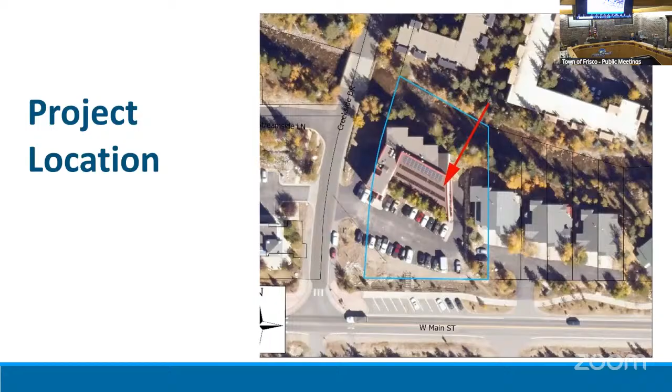So the project is located at 101 West Main Street. Please be aware that the lines on the photo are not survey accurate. So this kind of gives a history of the project, and no changes are proposed to the structure's commercial square footage, unit count, or bedroom count.

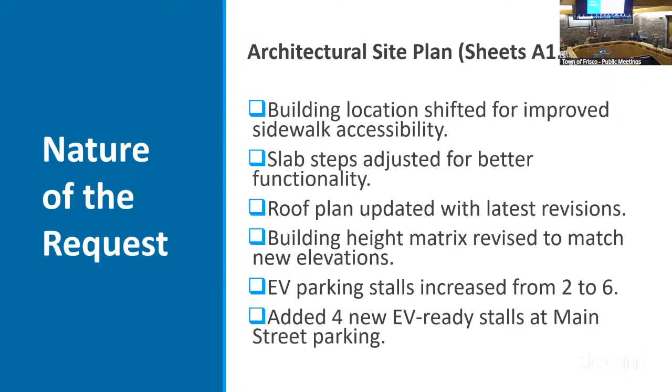So the scope of this application is narrowly focused. The recent updates to the project include a shift in the building location to enhance sidewalk accessibility and adjustments made to the slab steps for improved functionality. The roof plan has been revised and the building height matrix has been updated to reflect the new elevations. Additionally, the number of EV parking stalls has increased significantly from 2 to 6, with the addition of 4 new EV-ready stalls at the Main Street parking area. Parking continues to meet all requirements of the town code and the PUD.

So the overall floor plan has been adjusted for functionality and alignment, incorporating modifications such as slab ramps that match the new elevations. Additionally, the floor to floor height has been increased to 10 feet 4 inches. Airlocks have been added at both center entry doors, and the elevator has been relocated for improved layout efficiency. Community spaces have been realigned and unit layouts revised based on valuable feedback to better meet the needs of the residents. You saw the list of architectural floor plan modifications in the staff report. These are not modifications that are tied to Planning Commission criteria, with the exception of the relocation of bicycle storage, which continues to meet the code.

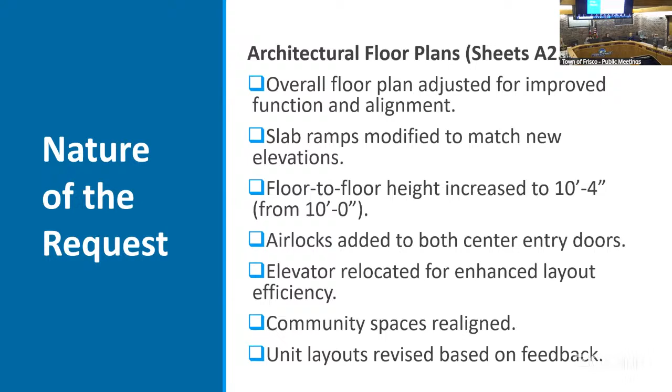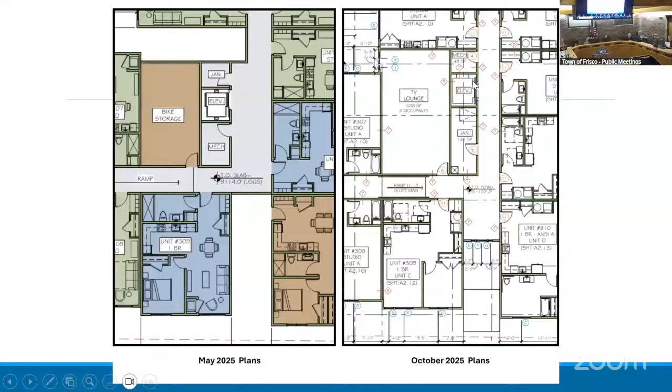And so these are some of the representations. As you can see, the picture on your left are the May 2025 plans, and the picture on the right is the October 2025 plans. Can you see my cursor? The bike storage here has been increased because it has been moved. This is on the second floor. This is no longer bike storage, it's now an office center. And then on the third floor, instead of bike storage, we have a TV lounge, and the elevator and janitorial services.

The existing pitched roof will be replaced with a flat roof to accommodate necessary mechanical systems, while a mechanical screen will be installed to obscure rooftop equipment in accordance with the code. This new design adheres to maximum height limits, and full roof plan details are available on page A2.4 of the application. These changes continue to meet town code and the maximum height limit as defined within the property's PUD. So these are the two examples of how this used to be a pitched roof, and now this is the flat roof.

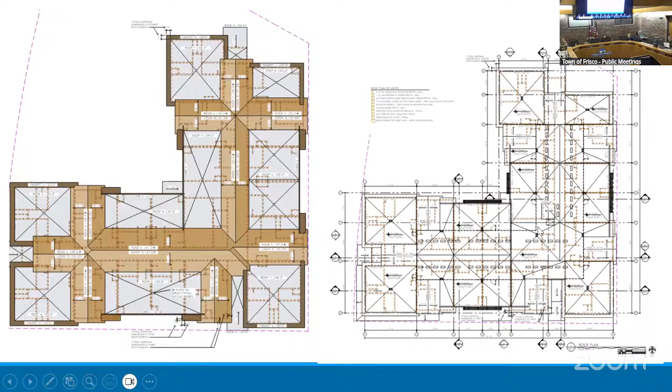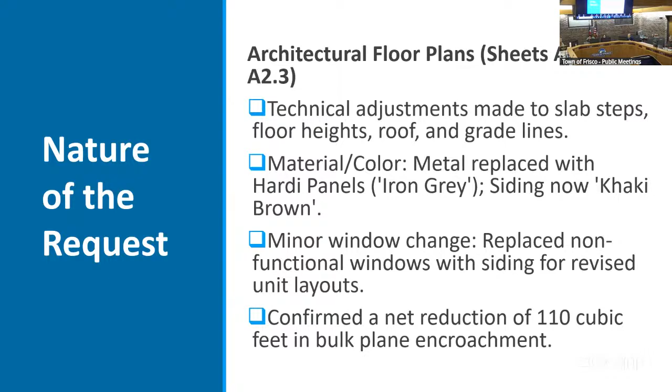Recent technical adjustments have been made to the slab steps, floor heights, roof, and grade lines to improve overall functionality. The materials have been updated, with metal replaced by Hardie panels in iron gray, and siding now featured in khaki brown. Additionally, a minor window change has been made, replacing non-functional windows with siding to accommodate revised unit layouts, resulting in a confirmed net reduction of 110 cubic feet in the bulk plane encroachment.

Staff put the findings in the presentation, but I'm not going to read them all since they're fairly extensive. We based them off of the previous site plan application, and there are 8 findings that staff believes meet the code. Staff recommendations include conditions of approval that the project shall include the updated exterior materials, colors, and internal components as outlined in the application, along with the conditions that were part of the original major site plan approval. Should the planning commission agree with staff, this is a motion to approve the modification. With that, I'll open it to any questions.

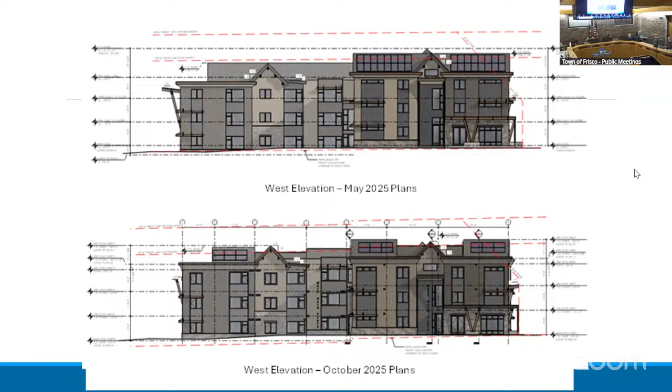Could you go back a couple of pages? On top is the original and the bottom is the proposed. Where you see on the roof on the top, there are three sections that each have about six of those solar panels or windows—I'm wondering, is that a pitched roof or is that the parapet? Yes, that's a pitched roof. This is where there will be a flat roof, and the AC mechanical equipment will be behind this. So that is flat where I see what looks like windows or panels? Those are pitched—they're just slightly pitched. It's the same pitch we had, but we cut it up, and in between the pitched roof we added sections of flat roof.

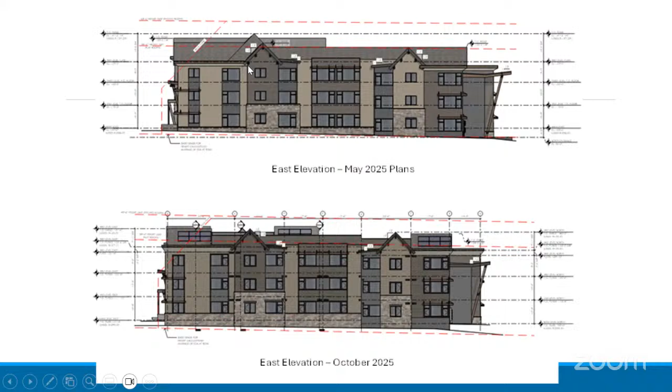I'm good. Okay, life is hard.

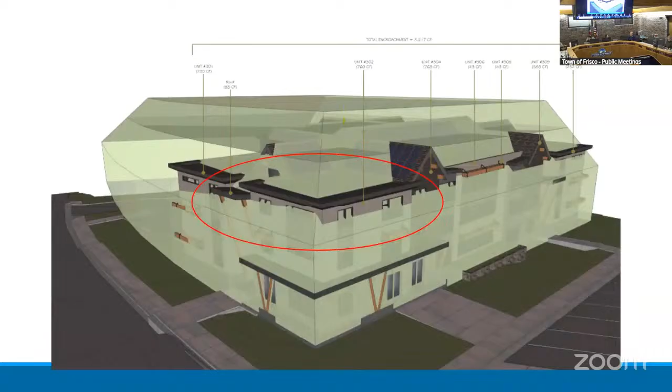I don't know what an airlock is. So, let me show you on the plans. This is a door, this is like where the door opens. There's an entry, and down then to the right, see it? Can you see my cursor? See where she is? This thing at the bottom, oh, like a vestibule. No, it's an airlock because you've got an entry door and then a second door. Okay, that's great. Learned something new, thanks for educating me.

Okay, one other question. The office went from the first floor to the second floor. Do we know anything about that space? It just is, it was on the first floor, but it's gonna be on the second floor. No, it actually wasn't there. And so now instead of bike storage, they're making it an office center. Is that like for the management of the building, like a leasing office? Potentially something like that. Okay, I don't think I had any other questions.

Is there anything you think we should specifically be aware of in terms of how the architecture changed? Not necessarily how the architecture changed, but a bit of background: when I spoke with the applicant, the reason they're changing some of the aluminum siding is that it's a long-term maintenance issue, it dents and isn't as hardy as Hardie board. So they had aluminum siding and they're going to Hardie board. It's kind of weird that they had aluminum. I think that was roofing. Oh no, that's siding, you're right. Thanks, no other questions for me.

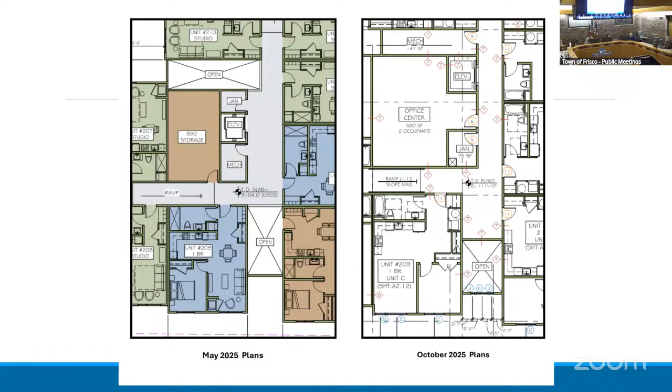April, do you have any questions of the staff? No, Ira covered my questions, so I'm good.

My question is, just trying to remember, was this the building that was supposed to have a mixed-use component? It does, it still does. What is it? Let me just grab it. 1,546 square feet of leasable non-residential space and 52 deed-restricted residential dwelling units. Okay, so it still does, okay.

And then the additional EV parking, what does that do to the parking? It's gonna just shift it a little bit more down Main Street. All the parking is in the same spots, but they're taking ADA, or the feasibility, and we can have the applicant explain it more. It didn't make sense where the ADA and EV spots were going, so they've basically flopped some spaces around from where they were originally approved.

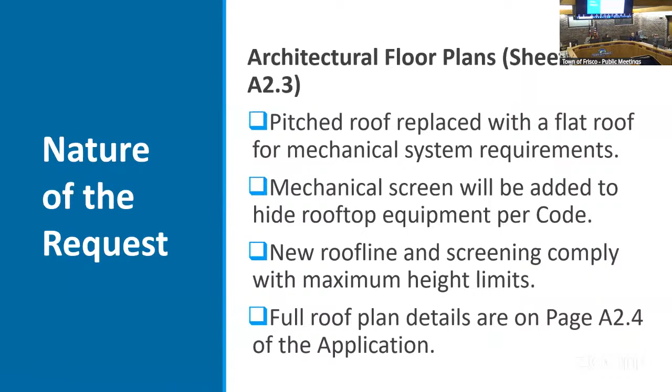And all that parking you're talking about is on the street? Yeah, yes.

Even though Kris is pulling it up, it might be better to have the applicant show it when they present, to explain exactly what is being relocated. She can pull it up to look at now too, just because we don't have the before and after. So does that mean the EV parking would be available to non-residents since it's on Main Street? I'm not sure, she's remote, so let me zoom in.

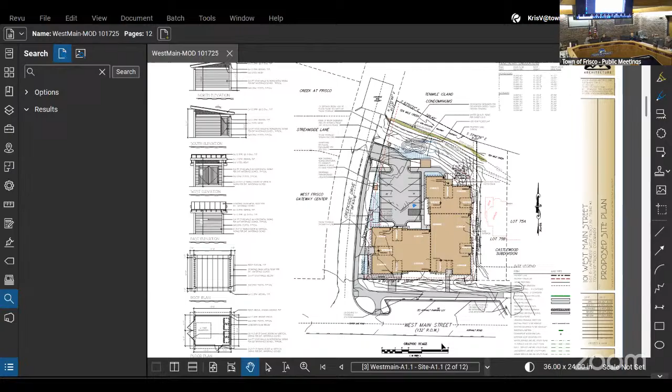Too much, yeah, one that shows the parking spaces. But Aaron doesn't have it. There we go. No, okay. Come on.

Okay, so this is where we have the parking. This is standard town parking right here. These are the ADA stalls. These are gonna be permitted residential parking. And then here's where the ADAs are, and then car share is gonna be over here. And then there's also ADA here, and this is where the charging stations will be.

Okay, and before there were only two, or another six or something? Yes. Okay, and those are reserved for residents or can anybody park there? It says permitted resident parking. Okay, the EV parking, all those yellow ones? All the yellow ones. Okay. And that was always the case, the yellow ones were always gonna be permitted? Correct. Okay, I think that they shifted, the applicant can address this. I think you had commercial maybe on the left of where you're looking, where the ADA are now.

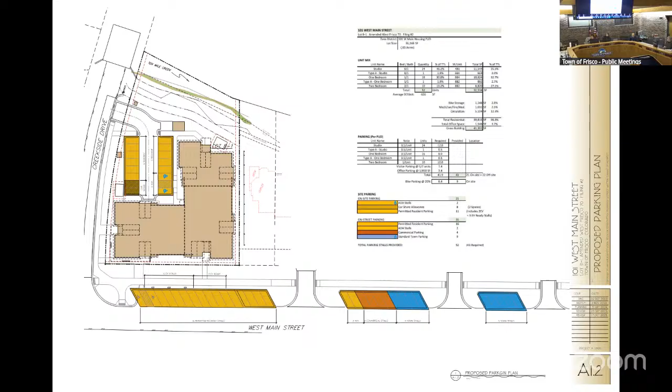And it's because the town code allows this for affordable housing projects that qualify under the code. So, actually, do we have some of that on Third, or no?

So the town started kind of what we call a pilot program. There's 2 side streets that have overnight on-street parking right now in town. They help manage some overflow parking that we've established. And actually, there might be 3 — they might have added one by 619 Granite now. The town was going to analyze that for about a year or two, see how it worked.

Those are up for anybody to park in overnight. They're signed and you flop between opposite sides of the street, so you have to follow the signage. So that's not necessarily like a permit parking system — it's more of a free-for-all for the town. This will be an actual permit process that will have to be managed by the property management company.

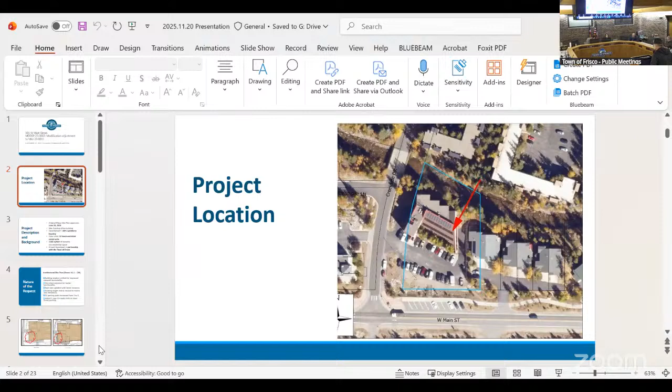One more question on the solar panels. It looks like things shifted around. Thanks for the explanation on why the shift happened. Did it change the power output you anticipate, or are you net even? No, I don't think that changed. It just gave us the ability to locate those panels in more conducive spots for solar. I may have misspoken, I'm not sure if we got more, it just worked out that the layout worked better, so we didn't change the energy. I mostly bring it up because it's good feedback if our energy code is requiring one thing but then we can't get the other thing. It's just good to keep in mind.

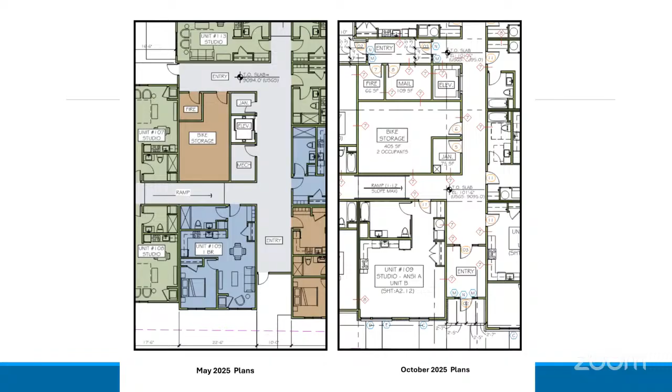Same, I understand all the changes and why they're being made, and I'm excited to get this building underway. Yep, and I agree - I think you're making a lot of improvements and it doesn't really seem to affect the architecture in a negative way, so I don't have any issues with the changes.

Does anybody want to make a motion? I'll do it, I never do it. This one feels safe - you might have a new job.

With respect to file number MODSP 25 0003, I move that the recommended findings set forth in the November 20th, 2025 staff report be made and that the recommended conditions set forth therein be adopted, and that the planning commission hereby approves the request to amend the materials, colors, and architecture of the building for the new mixed-use / affordable housing development located at 101 West Main Street, Lot B1, West Frisco 70, sub number 2.

I'll second. All right, there's a motion and a second. Do we want to do a roll call? Jay, Yes. Forsythe, Yes. Lesmus, Yes. Payne, Yes. Conley, Yes. Great, passes unanimously.

All right, okay, next item on the agenda: staff and commissioner updates. I just have one heads up that we are going to have a planning commission meeting on December 4th, at which time you will discuss the proposed new lighting ordinance and hopefully make a formal recommendation to town council on it. That will be the only item on that meeting though. I will probably not be there that day - it's my husband's birthday.